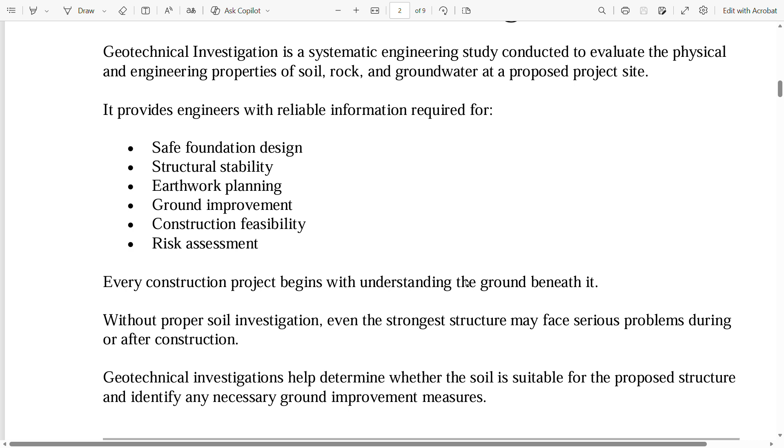Geotechnical investigation is a systematic engineering study conducted to evaluate the physical and engineering properties of soil, rock, and groundwater at a proposed project site. It provides engineers with reliable information required for safe foundation design, structural stability, earthwork planning, ground improvement, construction feasibility, risk assessment. Every construction project begins with understanding the ground beneath it.

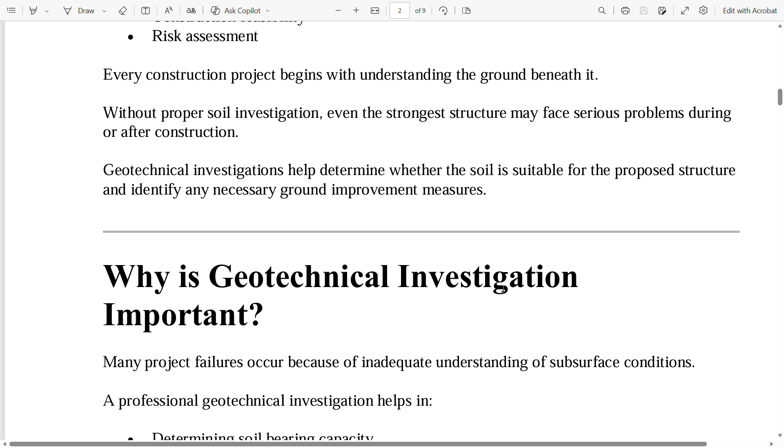Without proper soil investigation, even the strongest structure may face serious problems during or after construction. Geotechnical investigations help determine whether the soil is suitable for the proposed structure and identify any necessary ground improvement measures. Why is geotechnical investigation important? Many project failures occur because of inadequate understanding of subsurface conditions.

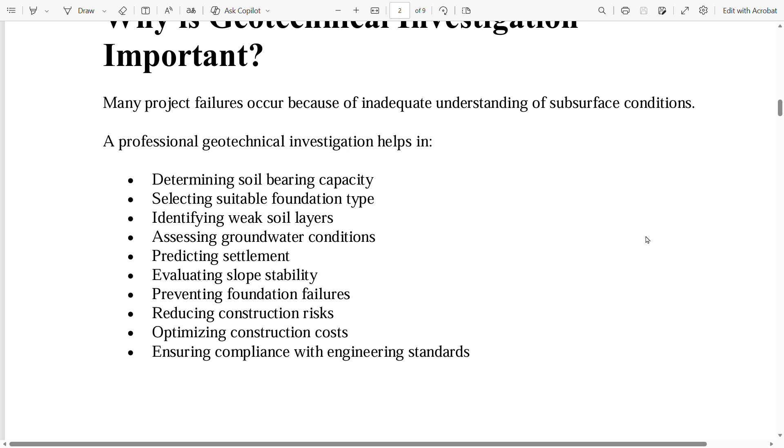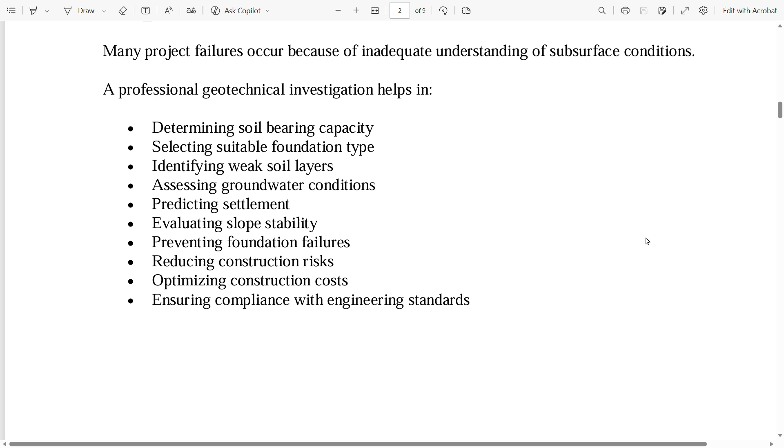A professional geotechnical investigation helps in determining soil bearing capacity, selecting suitable foundation type, identifying weak soil layers, assessing groundwater conditions, predicting settlement, evaluating slope stability, preventing foundation failures, reducing construction risks, optimizing construction costs, ensuring compliance with engineering standards. Conducting geotechnical investigations at the planning stage saves significant time and money during project execution.

Applications of geotechnical investigation. Geotechnical investigation is essential for a wide range of projects including industrial plants, manufacturing units, high-rise buildings, residential projects, commercial complexes, hospitals, educational institutions, warehouses and logistics parks, highways and expressways, bridges and flyovers, railways and metro projects, airports, ports and harbors, solar power plants, wind energy projects, transmission line foundations, oil and gas facilities, water treatment plants, mining projects, dams and irrigation structures. Regardless of project size, geotechnical data is a critical input for safe and economical design.

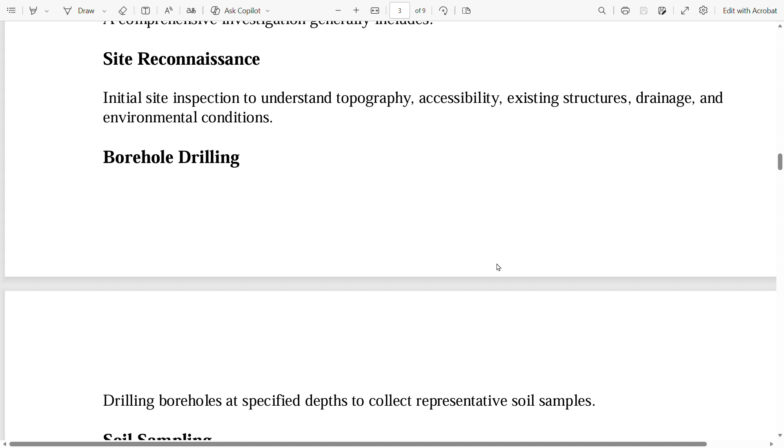Scope of geotechnical investigation. A comprehensive investigation generally includes site reconnaissance, initial site inspection to understand topography, accessibility, existing structures, drainage, and environmental conditions. Borehole drilling: drilling boreholes at specified depths to collect representative soil samples. Soil sampling: collection of disturbed and undisturbed soil samples for laboratory testing.

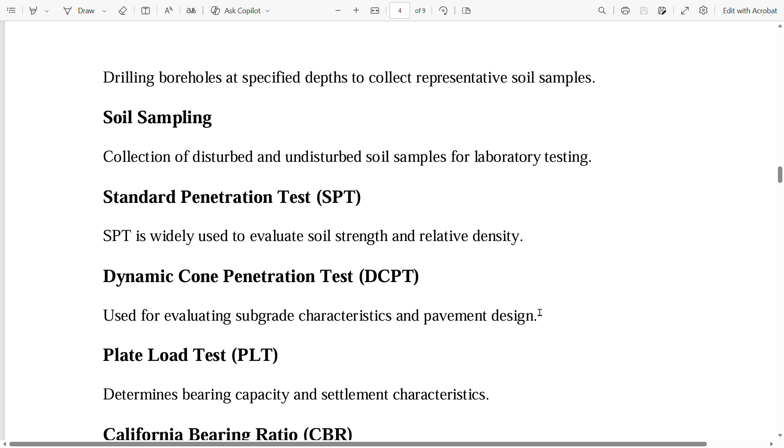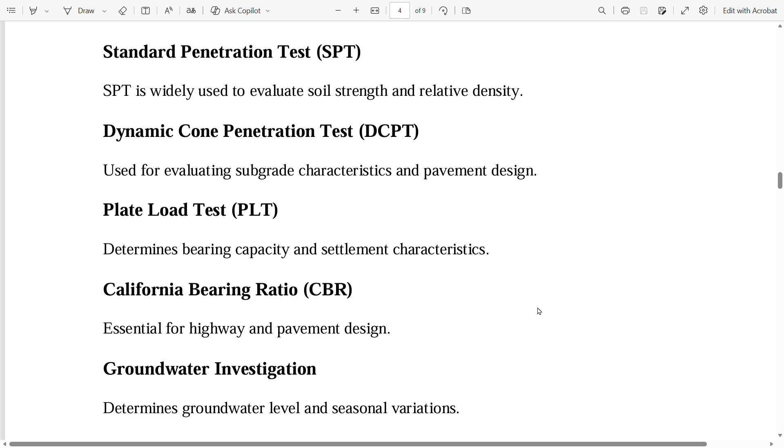Standard penetration test (SPT). SPT is widely used to evaluate soil strength and relative density. Dynamic Cone Penetration Test (DCPT), used for evaluating subgrade characteristics and pavement design. Plate load test (PLT), determines bearing capacity and settlement characteristics. California Bearing Ratio (CBR), essential for highway and pavement design. Groundwater investigation, determines groundwater level and seasonal variations.

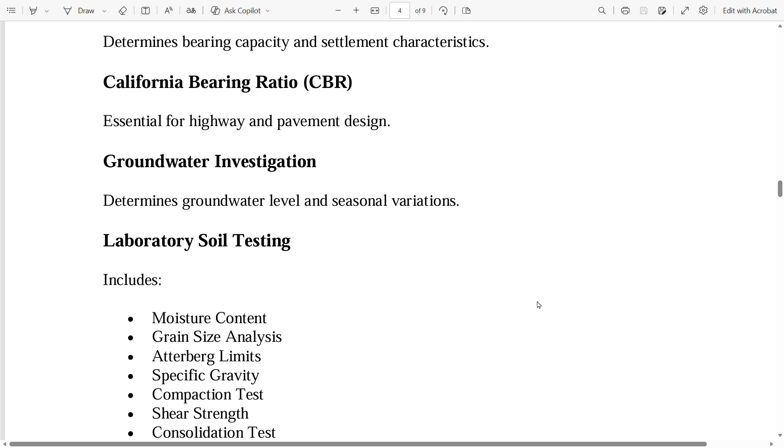Laboratory soil testing includes moisture content, grain size analysis, Atterberg limits, specific gravity, compaction test, shear strength, consolidation test, permeability test, chemical analysis, soil classification. Soil fertility investigation. For agricultural and horticultural projects, soil fertility investigation is equally important. Healthy soil leads to healthy crops.

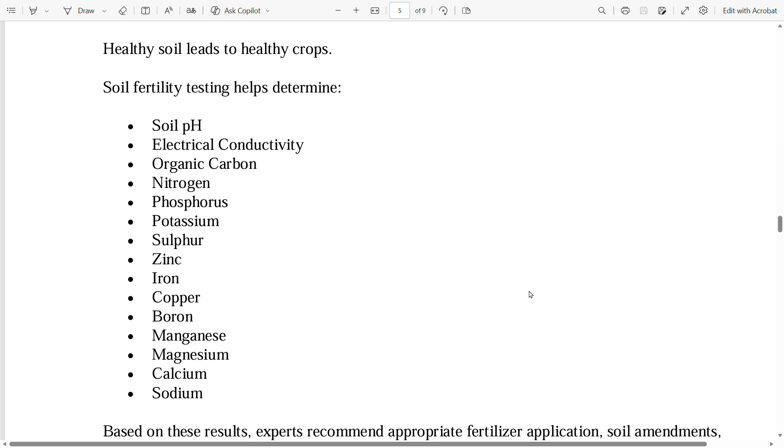Soil fertility testing helps determine soil pH, electrical conductivity, organic carbon, nitrogen, phosphorus, potassium, sulfur, zinc, iron, copper, boron, manganese, magnesium, calcium, sodium. Based on these results, experts recommend appropriate fertilizer application, soil amendments, and crop selection. This improves productivity while reducing unnecessary fertilizer usage and environmental impact. Benefits of soil fertility analysis.

Soil fertility analysis provides several advantages: improved crop yield, balanced nutrient management, reduced fertilizer cost, better water management, improved soil health, sustainable agriculture, enhanced profitability, long-term productivity. For commercial agriculture, plantation, landscaping, and horticulture projects, soil fertility assessment is a valuable investment.

Why does professional investigation matter? Professional investigations ensure accurate field data, reliable laboratory testing, engineering interpretation, practical recommendations, compliance with national and international standards. A well-prepared geotechnical report helps structural engineers optimize foundation design, reducing unnecessary excavation and construction costs while ensuring safety.